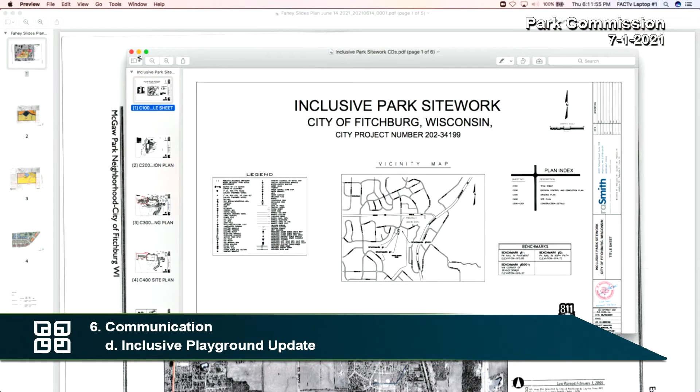It certainly was a decision that we contemplated, and Corey actually, I believe I sent to you an email from Corey that kind of rehashed the process that we went through in order to come to this conclusion. But certainly with the tree advisory committee and the city forester, they're truly interested in saving all the trees, and we certainly are of that same opinion. But at the end of the day, this option really made the most economic and logistical site sense for us. So that's what we did bid.

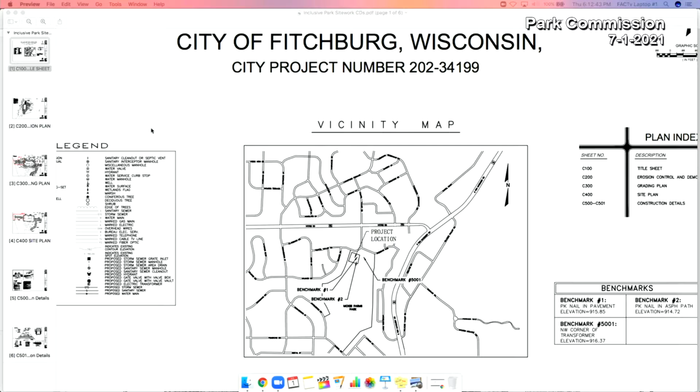So I guess what we're here to do is to discuss that a bit, if we'd like. Certainly Corey's here to answer any questions that the Park Commission may have. And I will tell you that we certainly are planning to plant additional trees and those kinds of things to replace the tree that we are going to have to remove.

So I think with that, we'll open it up for questions, if there are any, or Corey, if you had a couple comments to make. Sure, go ahead. Yeah, if I could, just to kind of lay the groundwork of how we are at where we're at and the thought process that's gone into that.

So I guess, first of all, as an introduction, some of you I know very well, some of you probably don't know me. I previously was the director of public works for the city. So actually, I believe these trees were the trees that were spaded from McKee Road to get installed. Verona, exactly. Yeah, Verona Road. From Verona and McKee Road.

Yep, yep. So the saving of these trees happened when I was at the city, and like Scott said, we don't take any tree losses lightly. We very much went through the design, trying to avoid any and all impacts that we could. On a personal level, I do the same thing on my own lot. I have some trees that probably should get cut down, but I don't cut them down because I really value trees a lot.

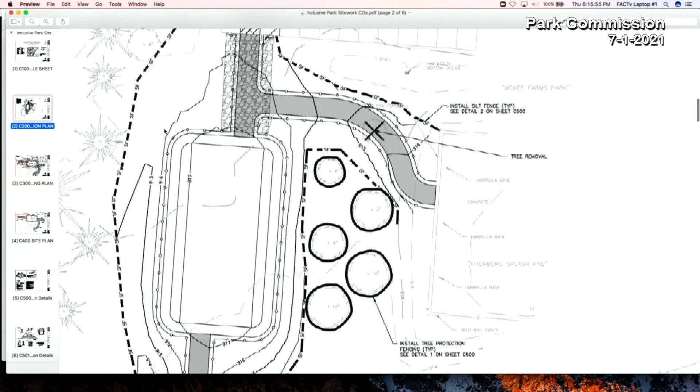So when we're doing a path, it needs to meet Americans with Disabilities Act requirements. So that dictates that you can have no more than a 2% cross slope. So in order to put a concrete walk along the parking lot, you would essentially have to fill in that entire stormwater basin. It would be very close to the traffic, and that's why that alternative was ruled out.

I guess before I move on to the other alignments, are there any questions related to that?

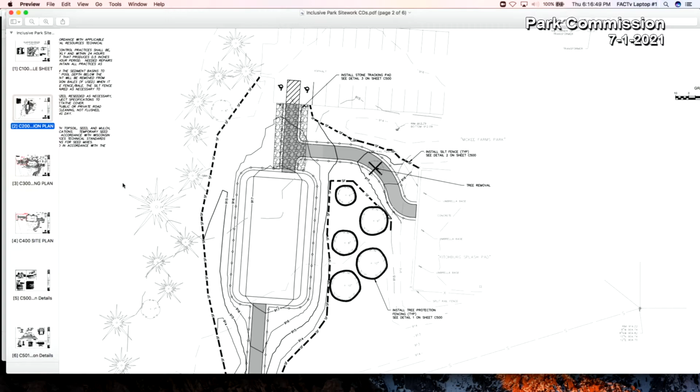The other component with that alternative is we're proposing to add additional ADA parking stalls further to the west that will serve the inclusive park, but also could be used for people accessing the splash pad. So we're trying to make our connection as short as possible for those users. Obviously, if people have difficulty with mobility, we want to try to minimize the distance that they need to travel.

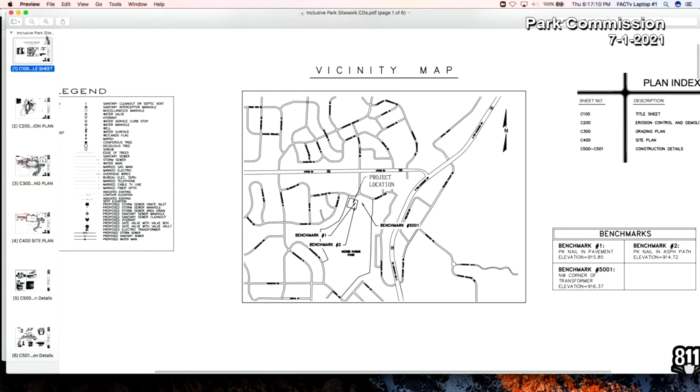So the other alternative that I see was to kind of move that connection point more towards the middle of the site. And there's a lot of things that you don't see on the exhibit that was our preliminary design. I actually gave a flash drive of our more current design. If you could go to sheet 3 or C300 and then pan down and a little to the right there. So you'll see our layout there, and you can, it's kind of faint, but you can see where the trees are as well.

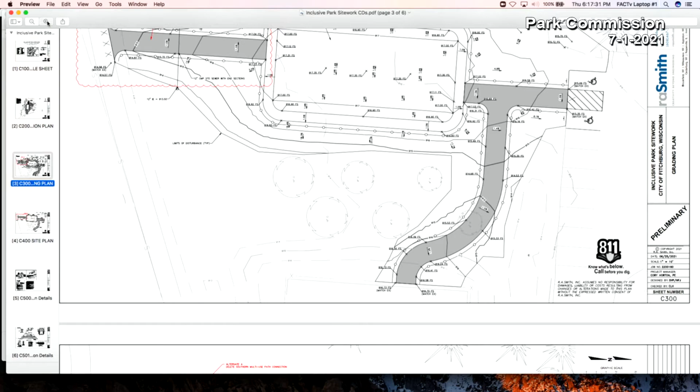So the distance between the trees is pretty tight. From a forestry perspective, there's a tiny bit of space there, but when you're putting paths in, if you start working in the root zone of trees, you're going to end up killing them, especially more sensitive trees like oak trees.

So to fit a path between those trees with the layout and configuration out there is very difficult, not only because of the width of the path, but also the elevation change needed to get from the inclusive park down to the tree elevation and back up to the splash pad elevation. The grading necessary is quite wide, and if you visualize that over where the trees are, there just isn't space to fit a path without working in the root zone and impacting the trees, or taking out trees in other locations.

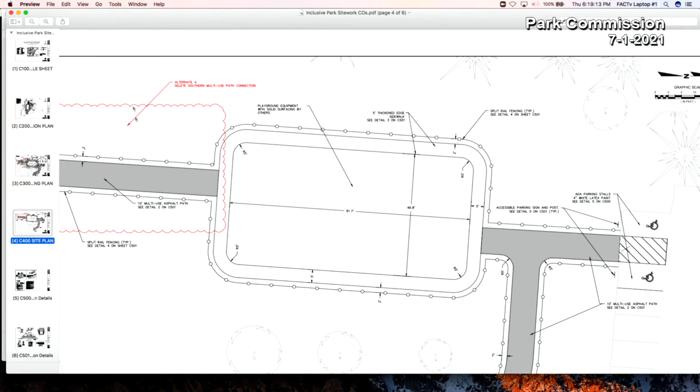So that's one reason why we didn't go down the middle of the site. Another reason is the connectivity between the ADA stalls we're adding and the splash pad. There may be users who park their car at the west side near the inclusive park and want to go to the splash pad first, and we didn't want them to have to walk all the way into the inclusive park if their destination was the splash pad. So that was another reason why we didn't put the path down the middle.

We also considered putting the path all the way to the south, going around the bottom of the trees. But that's a significant distance from the parking lot to that location—I paced it off, and I think it's something like 150 feet. So it's quite a distance to get from parking down to that path and back up again. Since this is trying to serve communities that may have more difficulty with mobility, that was not really seen as an option.

So that's kind of how the path ended up where we're proposing it. We tried avoiding all trees, and our plan ultimately is to, with the project, include planting trees in well-thought-out locations to add trees back in, create shade around the park, and provide places for picnic tables. We plan on using the city's annual tree bid to purchase trees, hopefully with some donated funds, to add trees throughout the site and get a lot more tree cover in the area.

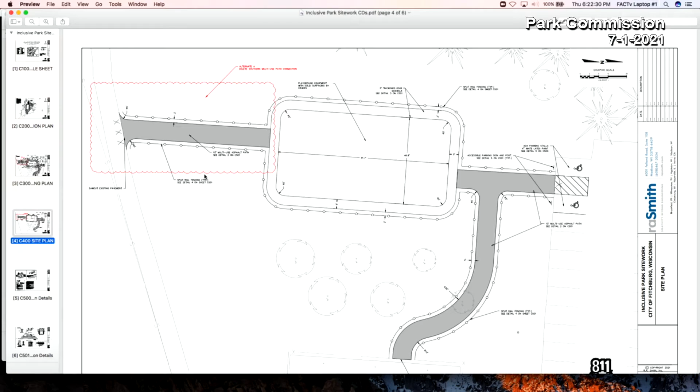That was also an alternate we looked at—going through those two northernmost trees to get the path through that location. Even with a 5-foot path, we weren't able to fit it in. I'm not saying between any trees, I'm saying swing around, keep the tree that's to be removed, and go to the north of it with a 5-foot wide path. Can you go to sheet 3 again?

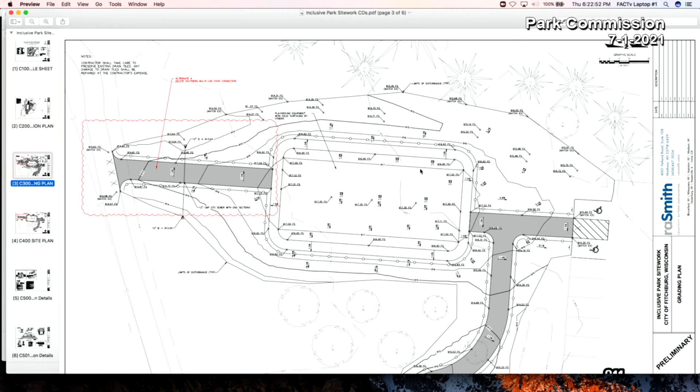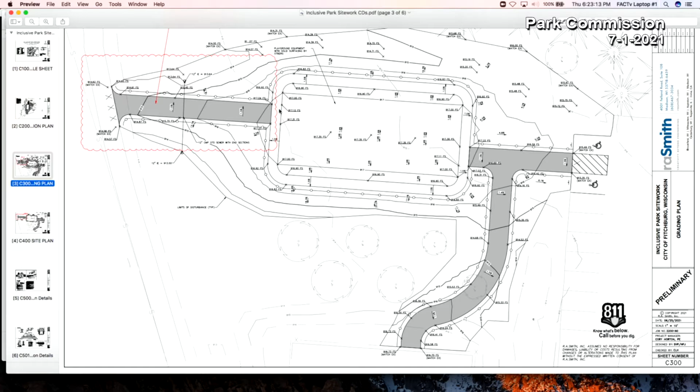The grading isn't going to show up super great, but if you look in the lower right-hand corner, that stormwater basin is in that location, and the slope is dropping off to go down to that stormwater basin. So that location is roughly 3 feet lower than what our splash pad and the inclusive park are. So there's a grade differential there. Pushing it would ultimately push that grade out and fill in the stormwater basin, which we can't do. We can't lose the stormwater treatment that was designed for the site.

In addition, the 5-foot path—again, this being an inclusive park, we're trying to make something very accessible. You can imagine, I was just out there recently, people pushing kids in strollers. We expect this will have a lot of users going back and forth, getting all sweaty and hot, then going to the splash pad and cool off. So we want to make sure there's enough room for two-way traffic of people in wheelchairs, people with strollers. That's why the 10-foot was selected instead of the 5-foot.

But, true, I understand what you just said. A 5-foot path wouldn't accommodate two-way traffic?

Even with a 5-foot path with the grading, I don't know that we can fit it north of that. I certainly can look at that location and see if that's possible. As it is, if you look at our grading plan, you can see the grades on the right-hand side. We're grading right to the stormwater facility. That's essentially as close as we can get without making those slopes steeper.

So we would take—I believe those slopes are a 4-to-1 slope. They would have to probably be 2-to-1 or steeper, which isn't a maintainable slope, and then it's also a safety concern to have that next to the path as well. So I can tell you right now, it would not be an optimal layout even if it does work, and it's highly unlikely that we could even still make that work.

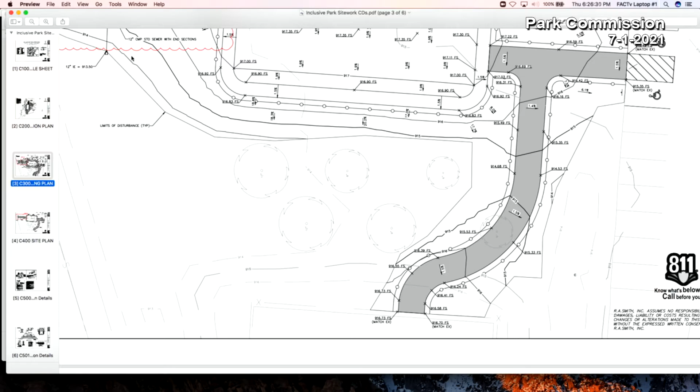Is the tree too big to be moved? It's very close, I think. I know when we spaded it originally, they had a pretty large spade for moving that tree. Right, but maybe—I don't have any idea of the expense. I'm just asking the question. I believe when we originally spaded all of those trees, I want to say it was about $1,000 to do all of those—may have been a little bit more than that. But how long ago was that? It was a long time—I think that was 2013. And they were really pushing the caliper to successfully transplant them then. And mobilization is what gets you too.

It's about the same price to spade 6 trees as it is to do. Right, yeah, I know it's not a realistic option really financially. The cost of trees has gone up so much in the last year itself.

Well, those, I think are my questions, and there's more here. Go ahead, Patrick.

One thing I would ask is that next meeting, or whenever we discuss this, we could have another map that's a larger area, so we can see how the other elements around here orient with this. I look at these dead-end paths and I'm trying to figure out where they go, what they connect to. I just can't tell. I did go there this afternoon to look, so I think I know where this goes, but that would be helpful.

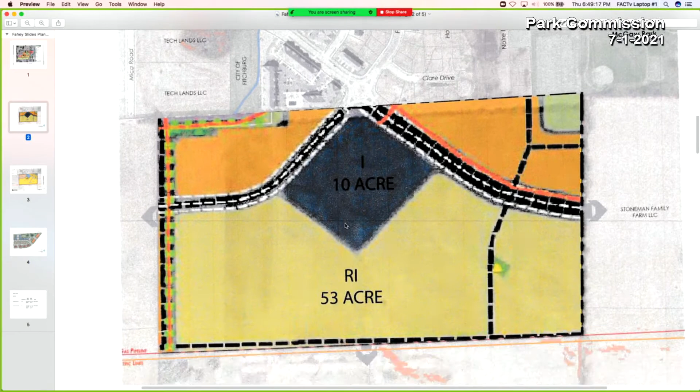This is a blow-up of the school site. If we go to the next one, it's more detailed. So the amendment is changing two areas. We have St. Ambrose as a school partner, and they plan to build on 5 acres. They are a classical education school, 6th through 12th grade, with currently 115 to 120 students. They have a layout that will go on the 5-acre institutional site.

And then we will have a 228-unit multifamily building on the left side of the screen, and the rest will be single family. Single family right now is penciled at 260, and those numbers are based on our sewer capacity, so there are some limitations on us to how much we can do. That's where those numbers come from. We also have to meet the 10 DU on the multifamily site, so the numbers are not just arbitrarily set — they are calculated based on our sewer capacity and the layout and balancing.

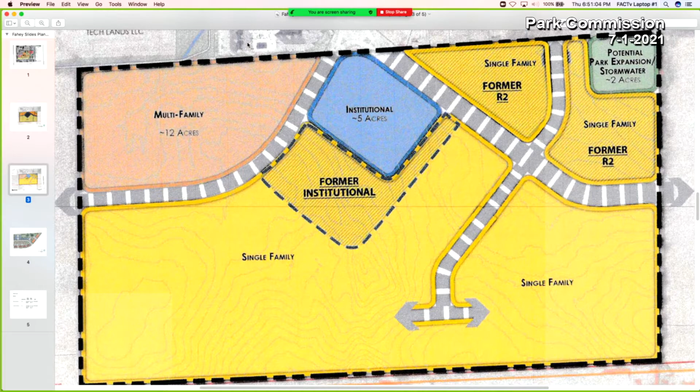So then the last, I just had a few numbers. We are going from the McGaw plan's 10 institution down to 5. The multifamily we are reducing to 228 units, and the single family is 260. Like I said, those numbers are based on our sewer capacity, so we are trying to balance our growth. So I guess that's the quick 10-minute version — I could make it 20 if you want, but.

Do we have any questions, comments?

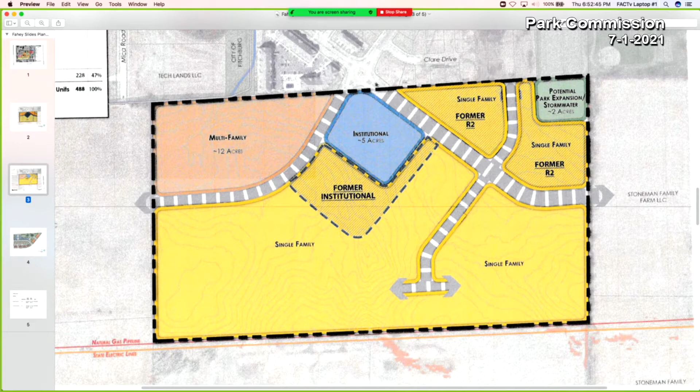Can you put back number 4? Where is the proposed school there? Go to number 3. So the school on number 4 would be on the left side, the 12 acres — where is it going to be? Up in the left corner is the multifamily site, and the school is directly... But which street is that? Because the roundabout is on the top part. Noble Drive continues to the left, and the roundabout is right where the arrow is, the existing roundabout off Fahey Glen and Noble. So the school is going to be in that roundabout, finishing out the corner.

Oh, okay, I have an idea now. So my question to you is, have you had a neighborhood meeting so the neighbors know about this school coming? We are planning to — we will have multiple meetings as we go, and we are having the first one in two weeks. We will send it out to our list that was provided by staff.

My question is, are we going to recuperate the density that we are losing? We are limited by our density based on our sewer capacity. My question was, are we, the city, recuperating the density that we are losing from doing this? Not on... Okay, we're not really going that much down in the numbers. We're still fairly consistent by the time you look at the net versus what we can build.

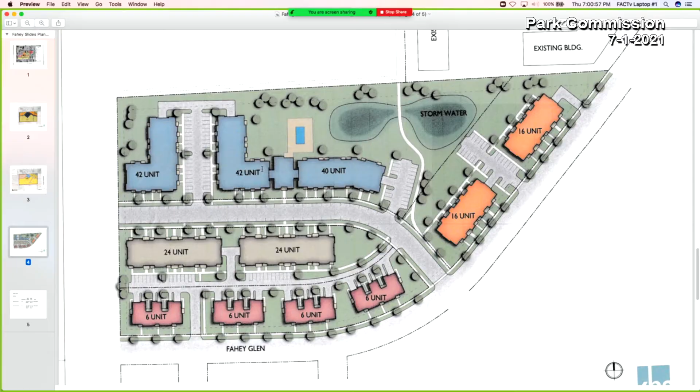We need to start doing the planning after we get the zoning approval. Maybe you can't answer this, but I'm wondering if this R2 area, or R1 area you're talking about for the yellow area, would pretty much look the same because it's a balance of higher density here and single-family there, on approximately the same size lots as the R2?

They will probably be smaller lots than our current R1. Smaller? There will be some smaller, and there probably will be some the same size. To get 260 on the number, including all the layouts and the stormwater and the sewer, it will probably be some smaller. We haven't done the calculations yet.

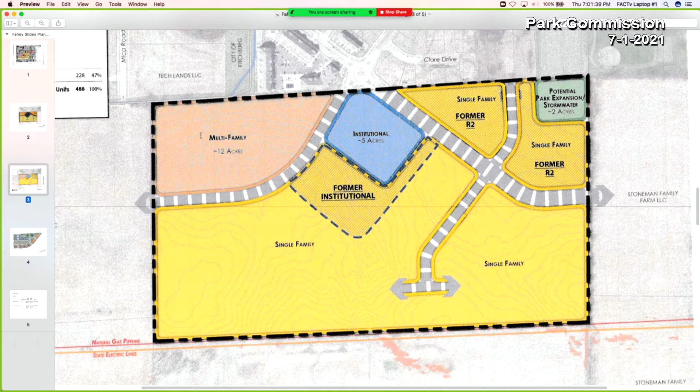A question, more for Scott. As you see these numbers, if the number of dwelling units is being reduced, does that mean that there's a credit or some refund or something back to the development for less dwelling units? Well, I think that was one of the list of questions that you provided.

And the city planner did provide those answers. I guess I'd refer to those answers, and everyone received those. Where is that? It was in an email that I sent earlier this afternoon, so everybody has the answers to those questions. I didn't see that. I've been out. What is the answer? I'd have to refer to that.

I would suspect that there won't be a credit, that each plat will start out at a starting point, so whenever the new plat comes in, that'll be accordingly with square footage and parkland dedication and such, there won't be any credit, if you would. It's all for new stuff.

I'm also remembering that when the pickleball courts were proposed a couple of council meetings ago, a month or so ago, you had reported to the council that this development was 12 acres deficient as it stands right now in parkland dedication, and does that sound right? That was at a council meeting. Yeah, the past development was 12 acres deficient, so we collected the fee in lieu of parkland dedication.

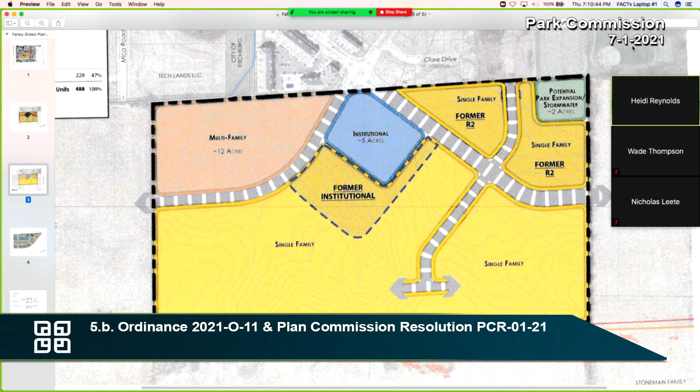Could I just clarify what the motion is, the original one, that this should be rezoned? If I could clarify, go ahead, Scott.

There was an existing Fahey Fields development, which the parkland dedication was already accounted for, the fee in lieu of dedication was accounted for, and then the single-family lots that Patrick is interested in trying to get for the city, that's off the table. That's an independent development that was the first stage. This is a second stage, so what Patrick is wanting, if I'm understanding him correctly, is to go back to the first development and try to negotiate, but what David Fahey is saying is he's got commitments to those lots already, so he can't do it anyway. At the end of the day, Fahey Fields Phase 1 is already done, the money is taken, the land is taken. This is the first step of the second phase, and the Park Commission will deal with this independently and not take into consideration anything that happened with the first phase, if you would.

Okay, thank you. So we had your proposal for a condition which we are learning we cannot do. And so Patrick—

I look at this as it's owned by the same developer, and if you don't ask, it won't happen, and if parties were agreeable, it could happen, so that's why I brought it up. If nobody asks, it certainly won't happen, so I'm asking.

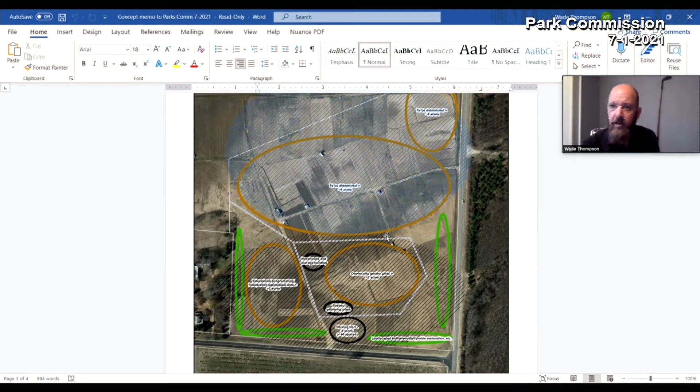So that's phase one. Again, assuming we get some park commission interest in proceeding with this concept, that would be planned for in the next couple of years. Now, phase two is again to the north.

I don't think we know exactly what would happen up there yet, but some ideas we've thrown around is what we'll call market gardens. Basically, market gardens are when people are growing for a profit. So still small scale agriculture, still kind of garden level scale, but folks are basically growing to sell at markets or to sell to local restaurants.

Now, I do want to point out that Dane County in their park system is doing this, so there is precedent in the region for these kinds of things to happen on public park space. Now, this would be a completely new use for our park system, so there's a lot of legal issues we'd have to explore.

At this point in time, we haven't got the go-ahead to proceed with this. There are some hurdles and some obstacles, but I just want to throw it out there that other folks, again, in the region are doing this. And if we truly follow this idea of a really comprehensive integrated ag park, a phase two with market gardens would be something that could be looked at in more detail.

Now, just kind of wrapping up, I think the key thing here with this kind of property is, again, it's a new idea. It's a niche park. It's designed for specific types of users. We think if we do proceed with this, it will draw from the community, but we also think it takes a level of management that city staff does not currently have as it relates to capacity and expertise.

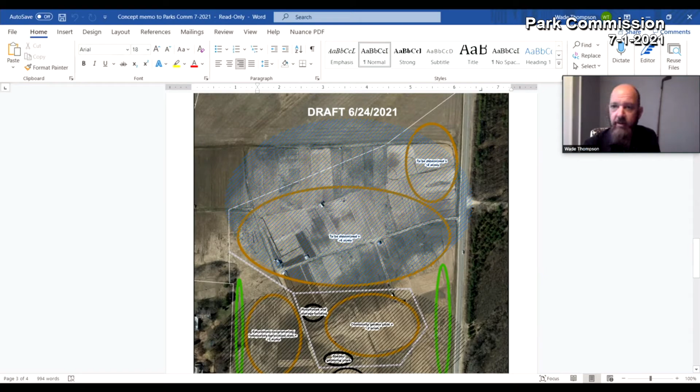So just kind of wrapping up, the potential process -- and again, this is all subject to Park Commission discussion and approval -- but if the commission does want to move forward with exploring this concept, staff sees kind of a 6 or 7 step process, public meetings to kind of kick this idea off.

And then I think what we're thinking is we would publish an RFP, which stands for Request for Proposal, to essentially solicit proposals from folks that would help us plan this property -- basically folks that have expertise in these ag park type parks. And I think the idea is that person who helps us plan it, or that entity, would also then become the manager.

So basically we're setting ourselves up for management in the planning phase. We don't want to do a really cool plan and then have no one to manage it. So the idea is we put out one RFP, we get proposals for planning and management, we select one, and then we work with that entity to plan and ultimately have them manage the park space once implemented.

Step three would be once we have that entity on board, the planner slash manager, we would hold additional planning meetings, then we would certainly prepare a master plan - basically the concept I just showed you, but probably tweaked and very much refined. And then we would present those plans publicly, present it to this commission, assuming there's buy-in from the commission, ultimately to council for a final approval as well.

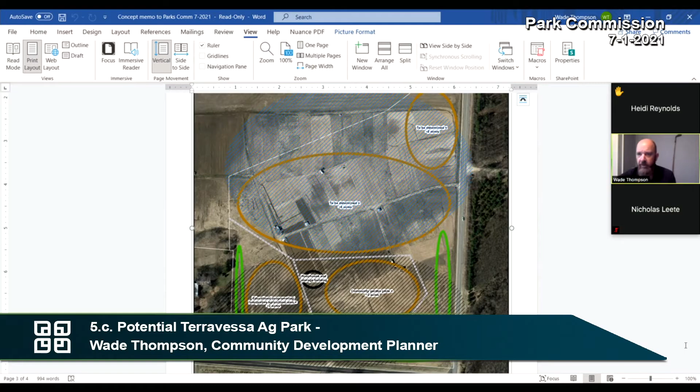Thank you. Okay, I have a question. Chris, did you have a question? No, okay. Can I address some of this? Is it possible? Yes. Yes.

Phil Sveem has some remarks he would like to make. Thanks.

So when Terravessa was created, this 20 acres that's located at the southeast corner of this neighborhood, by the way, do you have a map of the neighborhood itself? Can it be put up on the screen? Okay, well, that 20 acres

that you've seen a map of in detail this evening has always been part of the plan to create urban farming. And from a very sustainable neighborhood, it seemed to deserve an urban farm of this size that would not necessarily be turned over to a farmer or a cultivator. It'd be turned over to a nonprofit, as well as people in the community that wanted to rent spaces.

So when we talk about market rate farming and developing and selling produce, it's not from a large-scale farming operation coming in and taking over 8 to 10 acres and developing produce to sell down to the Dane County Farmers Market. This is hopefully for most of this produce to be sold in the neighborhood and in the surrounding part of Fitchburg. It's large enough at that point to have a weekly farmers market on its own, to perhaps add to what the Promega area does every Wednesday or Thursday.

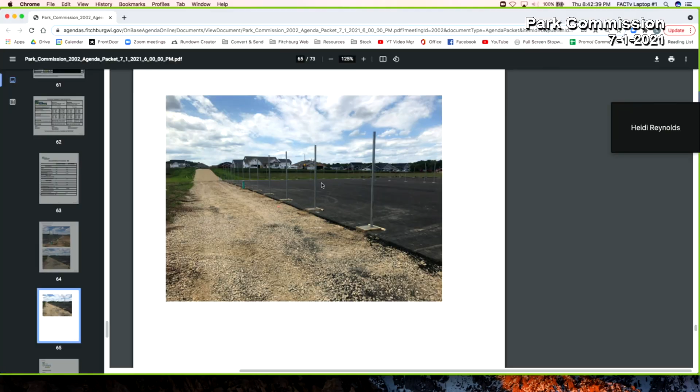One of the staff reports, Parks and Forestry Assistant LTE, doesn't have any name on it. That's Samantha. There should be a name on there, if you can find one. Questions can be directed to Samantha Swartz. Can you have her do it like the others, since she submitted it? Yep.

And then the next two meetings are August 5th and September 2nd. I don't mean to step on your territory there. No, Sue, by all means. Motion to adjourn? Yes, motion to adjourn. Second. Those in favor? Aye. It's 8:43, 43 minutes over.